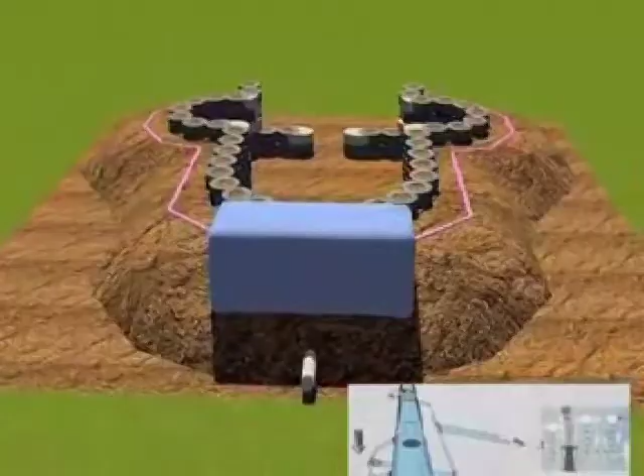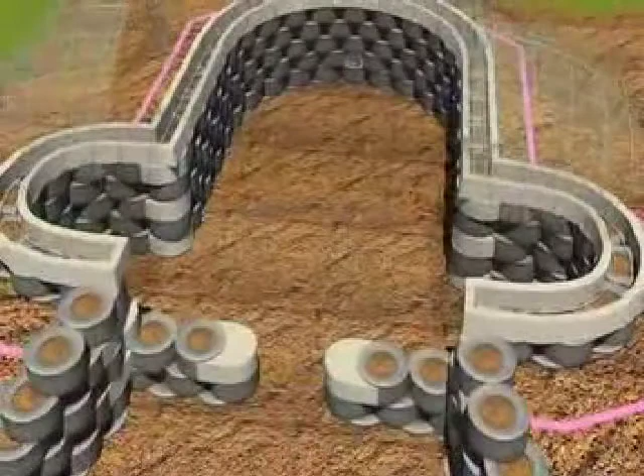The cisterns go in at this point in the appropriate place, and rebar pins go in to anchor the bond beam, which is formed by aluminum cans, to the tire work. The birdcage steel goes in at the same time, anchored into the bond beam itself.

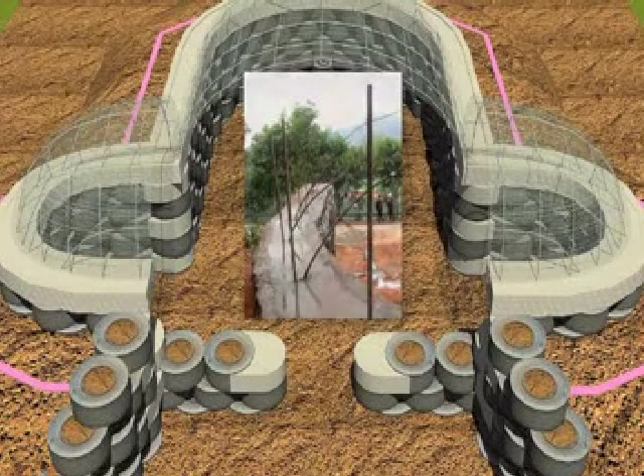The birdcage is a form for a ferro-cement vaulted roof structure. Here you can see how it is anchored into the bond beam with the steel. It is set up to receive several coats of plaster and be a ferro-cement dome.

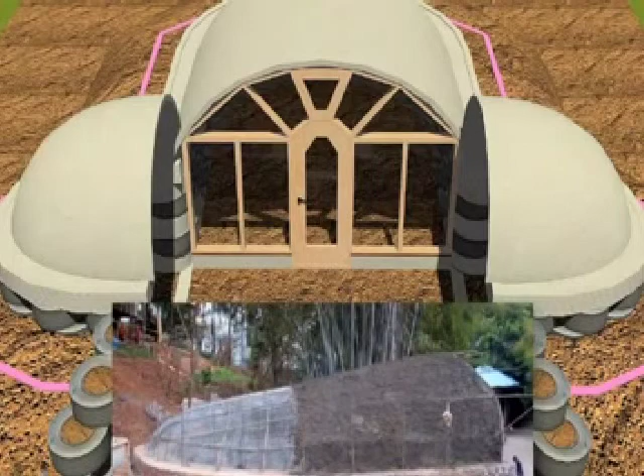The little footing across the front will take some framing as per the architectural drawings, non-bearing framing, just filling in for glass and a door. The vaults are then plastered, and the first coat of plaster usually has some fiber in it so it doesn't go through the mesh that is inserted underneath the rebar. And like I say, 3 or 4 coats of plaster gives us a ferro-cement dome that's very safe, very lightweight.

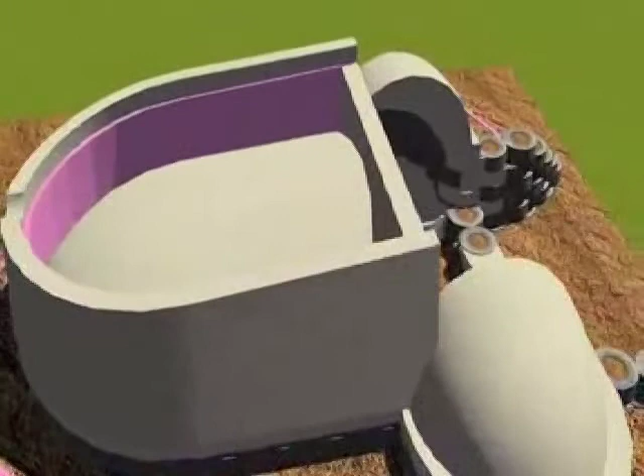Next we would be looking at the masonry work of aluminum cans going up around the vaults with a batter slightly leaning in, and a wrap of insulation, and then filled with dirt for a very simple thermal roof detail that will allow us a plane of earth on which to pour a slab that will give us a basic slab roof. We usually put insulation down there depending on the climate before we pour the slab. The slab then will drain into the cisterns.

This is using bottle or can masonry to form up for the dirt. We usually put a vapor barrier in right after the insulation as well under the slab. And then we bring the same detail around the little vaults, cap the thermal wrap, and bring the earth up for the final burial, and there's the gutter going into the cistern.

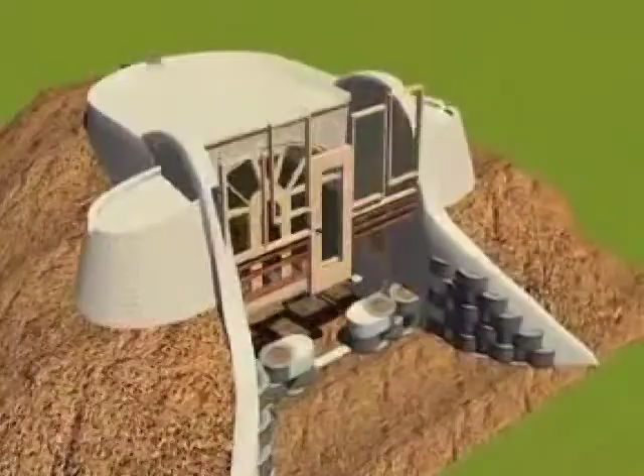Now we have the cisterns being wrapped in insulation and the final burial and shaping of earth going on to wrap the building. The front face greenhouse carpentry goes in, and the insulation on top of the greenhouse, the metal flashing. The place for the panels is delineated and they're installed. The operable gravity skylight is installed, and the building is essentially put together.

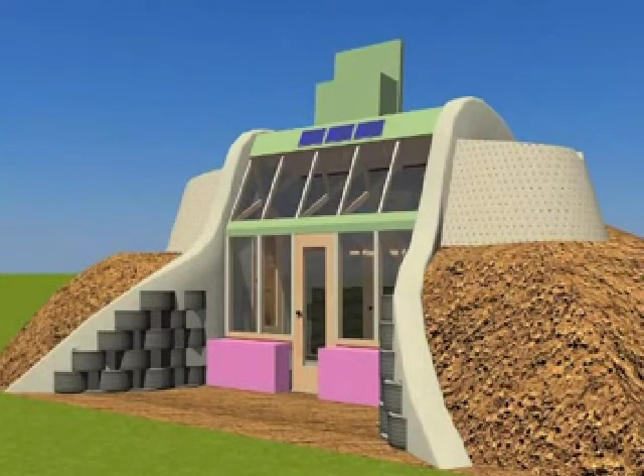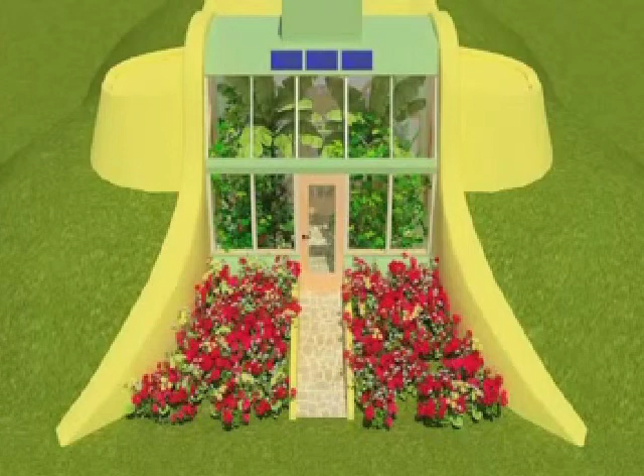At this point, we insulate the tire work in front of the greenhouse, put metal over it, bring up a berm there to snug the building in, and we are looking at the basic structure being done. Then planting goes in the botanical cells and landscaping, and we end up with a simple survival model Earthship. Architectural drawings for the systems will accompany this.

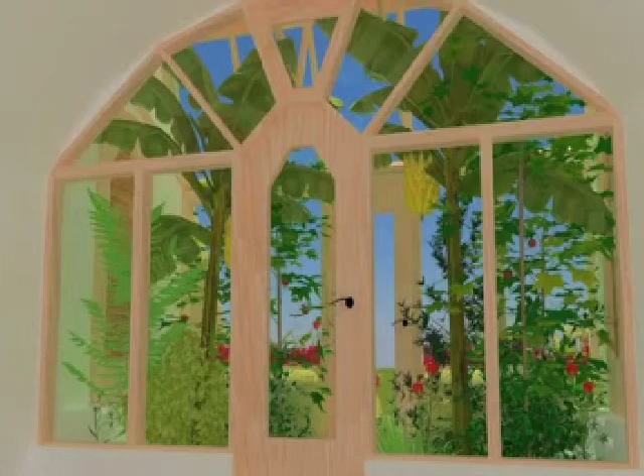Now we're looking inside the room, out toward the botanical cells, which are planted as soon as possible. Again, drawings for them are in the architectural set of how to achieve that. So this is the overview of the building.

Now we're looking at doing replications, as it is possible to do this in 2Us, 3Us, 4Us, however many you want. The same process is applied to make a full-on home, as many rooms as you want. Taking this basic model and turning it into quite a large home if necessary. It is a very simple set of details to put together, to replicate several times over and make a proven Earthship with all systems working.

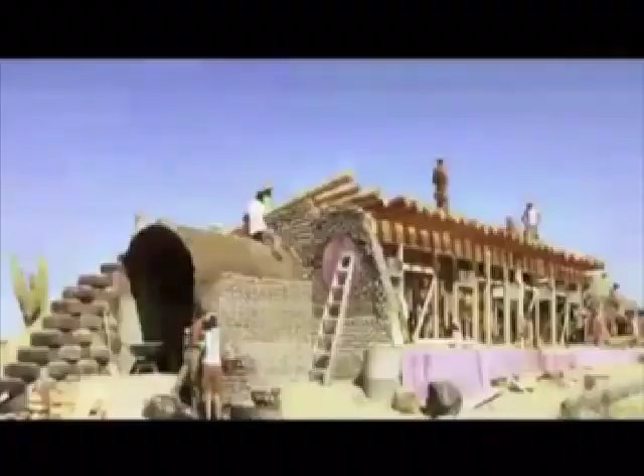Instead of reinventing the wheel, we will stand on the shoulders of giants by combining the 3 most promising technologies for a sustainable future: Earthships, aquaponics, and passive solar greenhouses. Earthships are sustainable structures designed and developed by Michael Reynolds. This technology enables a greenhouse to be 100% off the grid by using passive ventilation, geothermal heating, water collection, and renewable energy. It also allows the greenhouse to be made at an affordable price using recycled materials.

Aquaponics is a symbiotic system incorporating fish and plants that automates the production of a large amount of diverse food. Passive solar greenhouses capitalize on the cycle of the sun to maximize heat and solar gain, even in a freezing cold climate.

Can you imagine walking into your own greenhouse, smelling the fresh basil, picking your own lettuce, tomato, and avocado for tonight's dinner? This could be your reality. This is why it is our goal to bring easy, healthy, green food production into the cultural forefront and pave the way towards a sustainable future.

The funds from this Kickstarter will go towards the materials to build the first prototype for the farm of the future. We are filming and documenting the entire process so we can provide the plans at a very affordable price so everyone can access them. By supporting our project, you're an integral part in the shift towards our collective dream. Help us push this revolution forward by contributing and sharing. We are Valhalla.

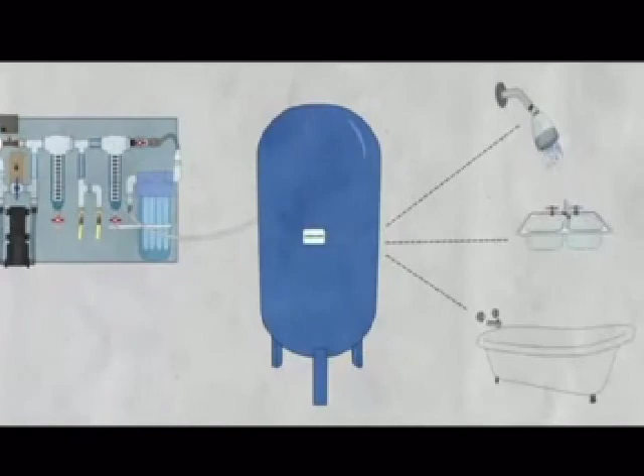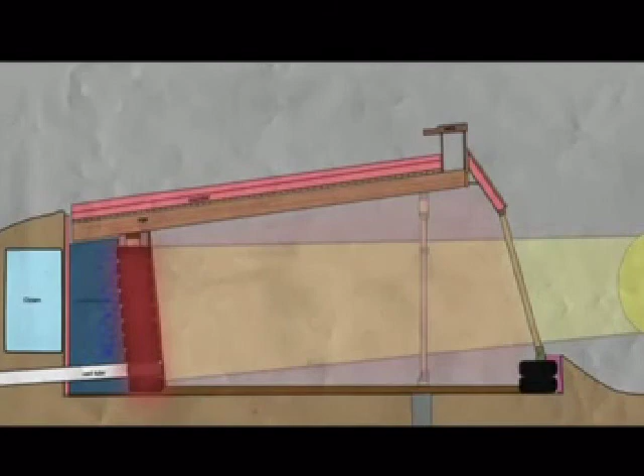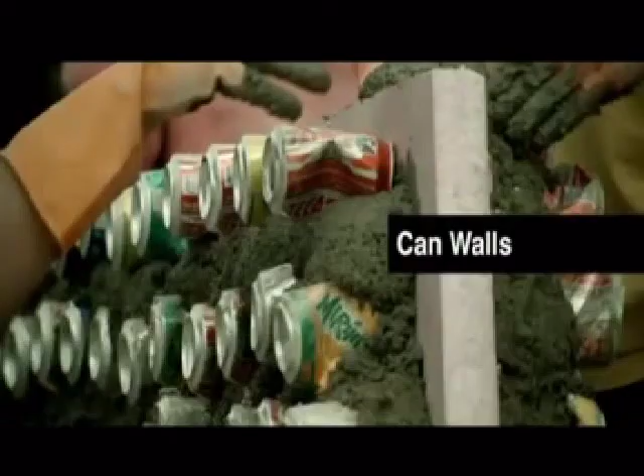An Earthship is a 100% off-the-grid structure invented by Michael Reynolds. Earthships use modern engineering to work with the natural processes of the planet, resulting in free and automated generation of food, water, and energy. All your basic needs are met at zero cost to you. They utilize the principle of thermal mass to stay around 68 degrees Fahrenheit, about 20 degrees Celsius, in even the most extreme climates, without any electric heating or cooling. They're also much cheaper than conventional homes and are made of mostly recycled materials.

Living at Valhalla will be like how we're meant to live, simply, beautifully, and together. Food, water, and electricity are plentiful. You're around like-minded people. There's always something exciting going on. There's always something new to learn or some new way to grow. This isn't just some hippie ideal. It's a feasible lifestyle, and we're making it a reality.

The most exciting part of Valhalla is the freedom it provides. With all of your basic needs met, you wake up each morning owning the day. You can follow your bliss without compromise. And the people best fit to change the world are those 100% absorbed in doing what they love to do. With communities like Valhalla, anyone can do that.

Valhalla started in April 2012 with a handful of people who were tired of waiting for others to be the change that they wanted to see in the world. So we bought 60 acres of land with no clear vision, but we knew it needed to be done. We planted some trees, gathered some people, moved into a house together, started a website, and Valhalla was born.

The number one question is, how are we funding this? We're going after funding from all angles. We're attracting sponsors, trading the skills of Valhalla members for goods and services, seeking documentary funding, using crowdfunding campaigns, and selling merchandise made within the Valhalla community such as soap, candles, and yoga mats. We're also running local events that promote the ideals of Valhalla.

In 10 years, we will have created the world we wish to see today. The Valhalla movement will be a network of sustainable communities, learning from each other, and helping budding communities flourish. The goal is to be mainstream. These communities will be a launch pad for social change and inspiration for the world to believe in sustainable living.

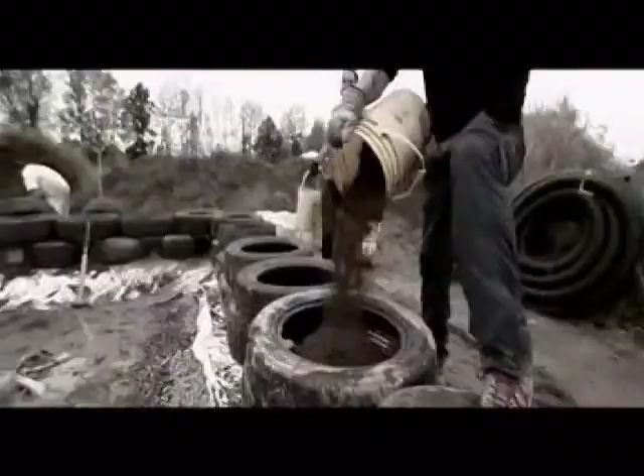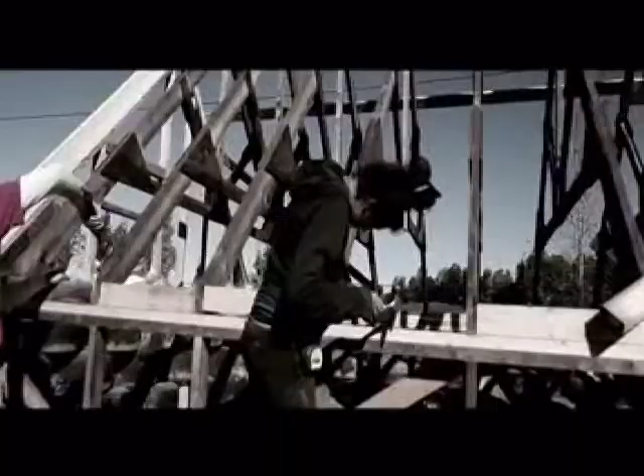So when you have this amount of people helping you, it's very easy to get stuff done. I feel like we accomplished a lot. I mean, we're only building a 10 by 20 greenhouse, and it's only the first building we're building here at Valhalla, and it took a lot of time. But that's kind of the point.

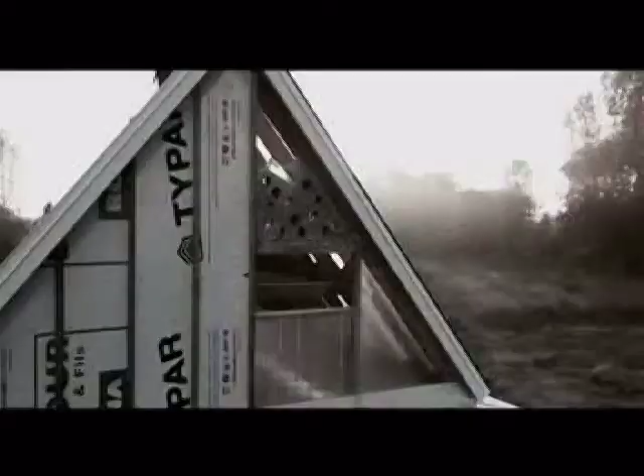So many people were telling us, no, no, no, it's not going to happen, it's not possible. It's going to take you years before you're able to use tires in construction and stuff. And, well, I kind of beg to differ. And it couldn't have been possible without the help of all these great, super friendly, and awesome volunteers.

Although our last crowdfunding campaign included a small budget to power our Farm of the Future Earthship-inspired greenhouse, the reality is that Valhalla's energy needs far outweigh the funds that we have set aside for such. In order to power the tools needed to build this greenhouse, we had to rent costly generators that have really slowed down the process of actually building something like this. However, this is all about to change, as we've created a new comprehensive energy plan that will suit the needs of the Valhalla movement that includes solar panels.

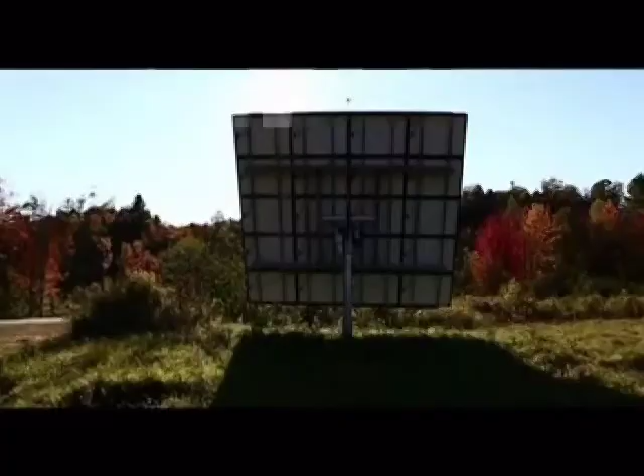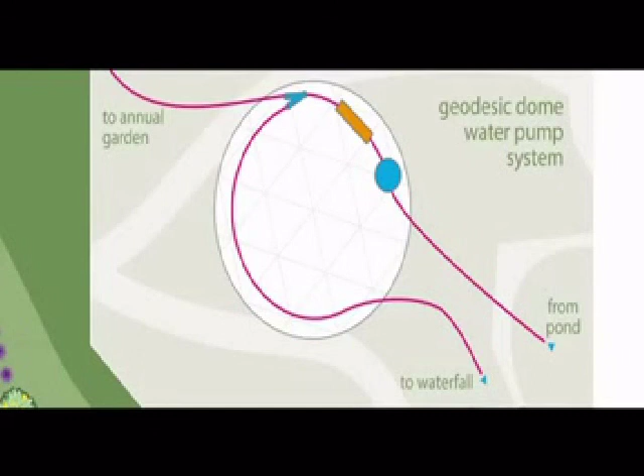The plan is to set up small independent sheds at different sites around the land in order to power the energy needs we have. An example of these energy needs would be an irrigation system built into the pond, which will come after these panels are installed. This will allow us to automatically water the hundreds of plants and trees we have spread all over, as well as filter and oxygenate the pond and allow plant and fish life to thrive within it.